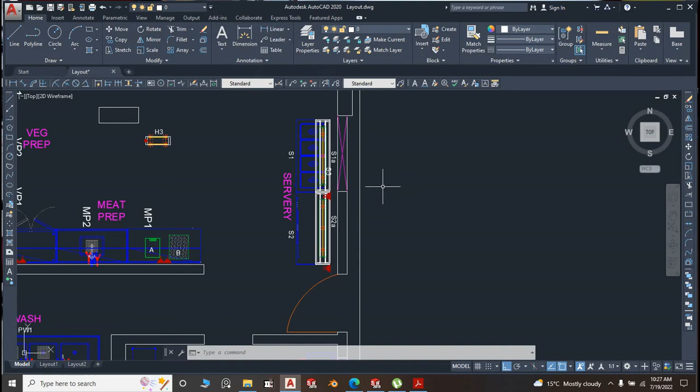So we complete it with savory, we go to prep area, then we will come to the cooking island. Right now, today we are talking about the 5 container bain-marie with a tray slide. We will talk about the hot pass, the heated overshelf later. Heated overshelf, it's not much.

Right now, this is the bain-marie. It's a 5 container full 1/1 GN containers. 1, 2, 3, 4, 5.

Now, this is the tray slide. Remember, the tray slide is supposed to be on the side where the waiters or waitresses are picking food from, not in the kitchen. This side is in the kitchen where the chef is serving from. You can access the undershelf from there. So this is on the side of the sitting area, right?

Okay, now this is one of many designs of a bain-marie. Our bain-marie, the well and the top is one, and it's a complete unit. Welding is done here and there. So you bend this alone, you cut and bend this side alone.

Now these dividers, they are not welded, they are just placed on top, so that should you feel like using a half GN container or a third, you can move them around and see how you arrange them.

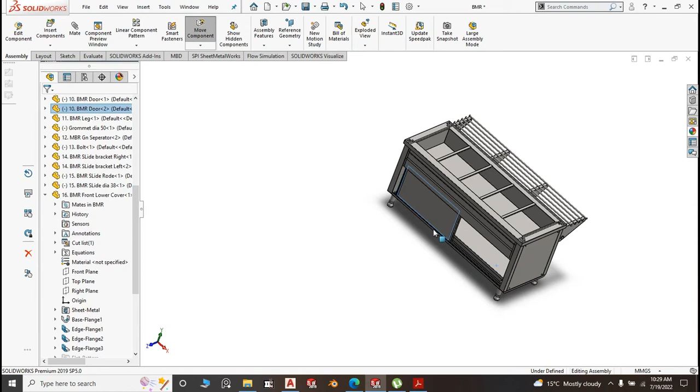Thank you. If you look at our bain-marie, the undershelf is not coming all the way to the front because of these sliding channels. I don't like this design of having sliding channels under there, but again, it's quite hectic to do sliding doors with top rails.

It will make this bain-marie a bit expensive, and buyers might not be willing to meet the price, so we do it like this, a little bit cheaper but very much working. The functionality of the bain-marie is not compromised.

The only thing I want to mention here is that the undershelf does not come all the way to the front because of cleaning. When you have these channels and they are on the same level, almost on the same level as the undershelf, cleaning will be an issue.

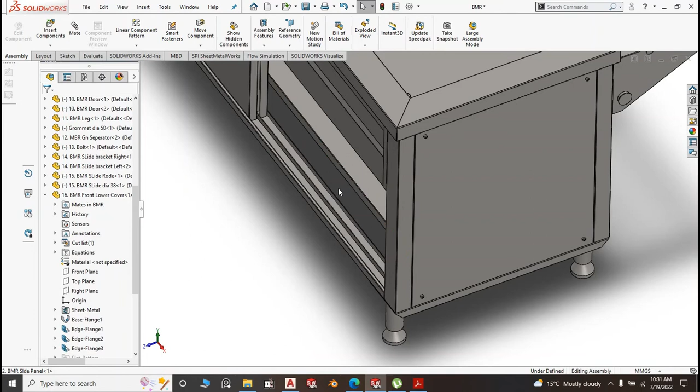And of course, given that this is a bain-marie, as you can see here, we have a hole for the drainage and a ball valve, which we are also going to design a bit later. There will always be water down here, so cleaning it, that's why you need this about 100 to 150 millimeter gap, so that when you clean, the water can go to the floor and you wipe the floor. You can also, if you want, punch some holes on these channels.

I wanted to mention those few things before we get right into it. The other thing is that this panel, as you can see, these are blind rivet type nuts. You call them what? We call them inserts here. I don't know whether you guys use the same word.

So instead of welding a nut on the panel, you do inserts, the ones that have threads. You want this panel to be removable, where you are going to put your conductors, your electrical cables and all that. You hide them here, and you want to be accessing them in case of any maintenance and repairs and all that.

Yes, we have different types of elements. Some people prefer putting straight elements, others a circular element at the center. Different designs of elements that you will take up with your electrician. The electrician will sort you out as far as the element is concerned.

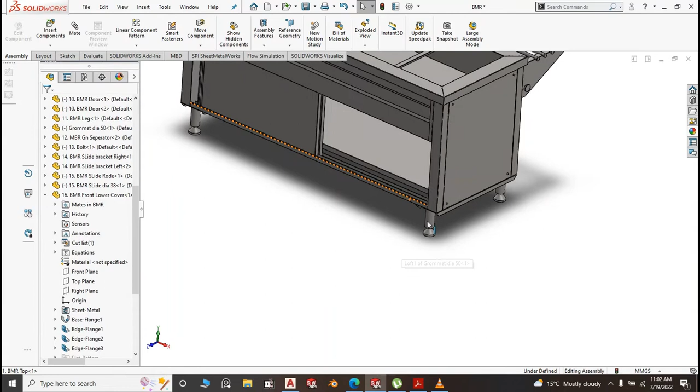Now on the other side, there is nothing, so this panel is fixed. You tack weld down here, tack weld here, and tack weld on the four corners. The idea is to avoid much welding, especially showing up on the front or body of the Bain Marie. The legs are adjustable. There is a channel under there for where you're going to weld your legs.

The others, let's talk about them as we design it. So I'll go ahead and close this, save all, rebuild and save.

Okay, now the size of the Bain Marie is 1830 by 700. And when you add the tray slide, it's 350 at a height of 200. It has tubes, stainless steel tubes, dia 20, and some brackets.

We have a front panel. What I should mention here is it is very important you keep the internal size at 515 by 305, because a full GN container is 530 by 325. You want the GN to be sitting pretty well on top of the Bain Marie, so that it may not slide and sink in the water and your food gets into the water.

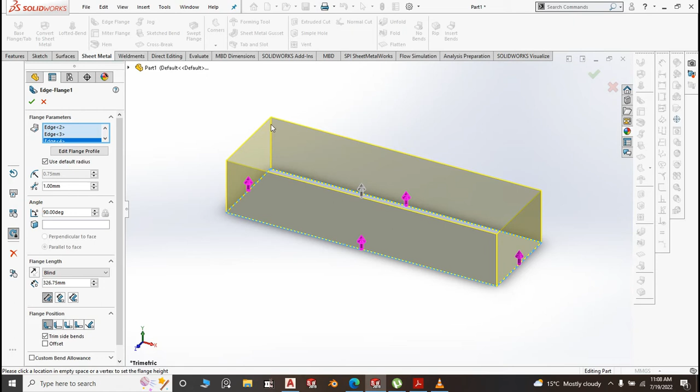Then we go to edge flange, and make an edge flange all around the Bain. If you are cutting this thing with a CNC machine, just do it - don't do this part alone and this part alone and this part alone. You will have a very big issue when it comes to joining them. There will be some radius, the gap will be very huge, and your welding should be done not from the inside but from the outside, with a very small gap.

Actually, the gap should be like 0.1 millimeter - the radius gap is 1 millimeter. You're trying as much as you can to make sure the gap is very small so that the welding might not penetrate, because polishing this corner is very hectic. So when the gap is so small, you just do the pickling paste, clean it, and that's it - no welding there, because when you put your welding machine here, the tool will touch this face and that face and leave marks, and it won't look neat.

Now the other thing I should mention is the depth - the depth here is 200. This is determined by the depth of the GN containers. This Bain with 200 depth is for a GN container with a depth of 150. You don't want the GN container touching the heating element - there should be some clearance between the bottom of the GN container and the heating element. So 200 is ideal.

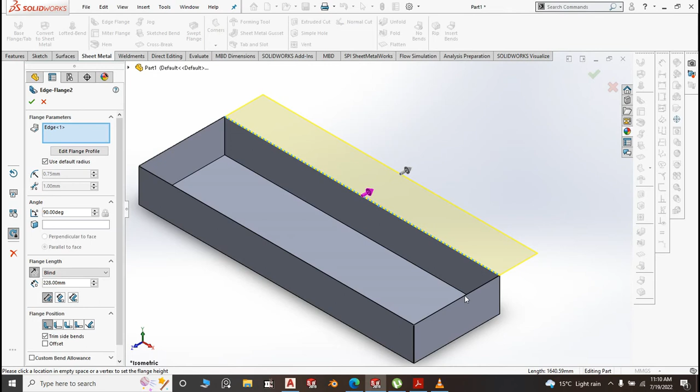Click OK, you're good. Now let us go again and do edge flange on this side, and you need to be careful where you are choosing your edge flange. If you choose this line, make sure all the others you are choosing from the same point.

Finally here, put your radius again to 0.1 - I will change that later, I will change the default to 0.1. This is supposed to be 93 because you want to keep the size of it to be 700 by 1830. That is the ideal size.

Now we go to closed corner - closed corner, and we are doing butt type. The gap there is 0.1 millimeter, and you choose this. It will choose everything, so clear it, choose this, go here, choose this. You can choose two corners and mirror the other, then choose this side, the corresponding or matching face is this face there. Right click - you can select all of them, but again you can do two and mirror.

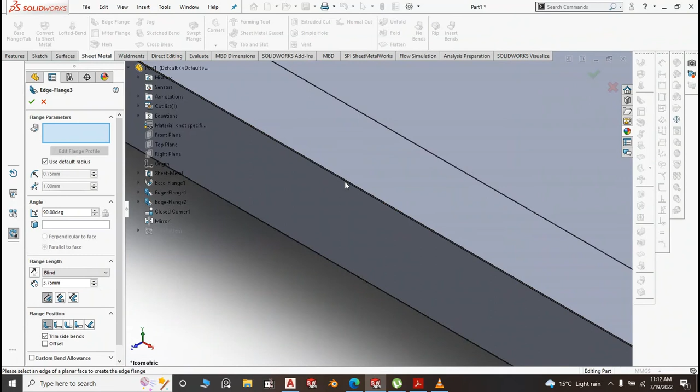Click OK, you have your corners. Now edge flange again, sheet metal, edge flange there.

Again, make sure the radius matches the others, that is 0.1, and the size is 50 millimeter. Keep material inside, and the length from the outer. Those are things you can manipulate the way you want. Right click or click OK.

There is something there with that edge flange, let us edit it. If you can see that gap, they will come to overlap somewhere. So this gap, let us make it 1 millimeter, that radius.

Now one should be big. Yeah, you don't want the overlapping. 1 mil, 2 millimeter. No, this should be 1.1, and this gap should be 2 millimeter.

Yes, see, they are not touching each other. That is why we were getting that error. I think that fixes it. Fixed, there is no error, as you can see. The gap is not that big, so you're welding, no issue there.

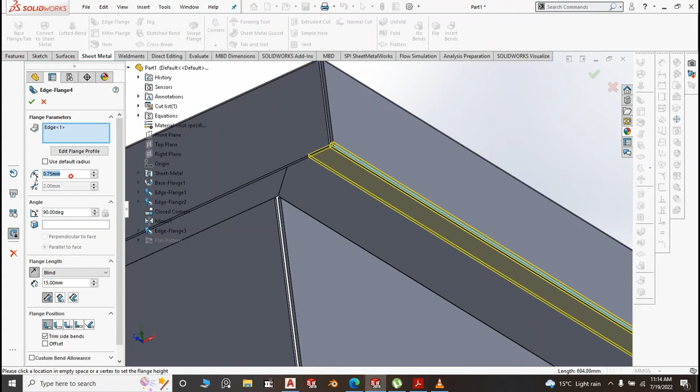Now finally we do an edge flange of 15 millimeter going to the inside. Choose outer, let us make this 15 mil, radius 0.1 again. Choose all the other edge flanges.

So you do edge flange there of 15 millimeter and you're good, right? So your top is almost ready.

Now some people, like I was saying, prefer doing this part alone, then the wall alone, then they come do the welding right here, which I don't like that design, but it is a bit economical as far as the material is concerned, but it adds you a lot of work.

So go ahead and save it, the way you have been saving them. I have a folder here known as Bain, and I will save this as BM top.

Save. Now let me do the hole for the drainage. Normal, choose that face and do a new sketch. Circle.

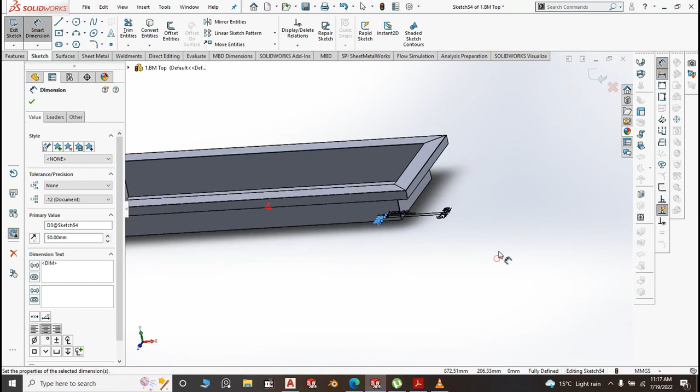And from this corner, make it like 100, and from the front side, make it 50. Again, you don't want the ball valve to be far away such that somebody needs to bend and insert their hand in there to open the ball valve. Yeah, you want it right near you.

Extrude and cut, link to thickness. Yes, your hole is there, your hole is made.

Save. Now let me mention something else here. Let me save this in a form of DXF folder, DXF file.

Then we include bent lines. Just want to open it real quick. No, I don't need to go to AutoCAD. Well, when you are doing your nesting, let me open this file with AutoCAD.

PC, desktop. Let me go to desktop, projects, Solidworks, layout, BM, DXF. Yes, here you go. So what you are going to do is you take this and this.

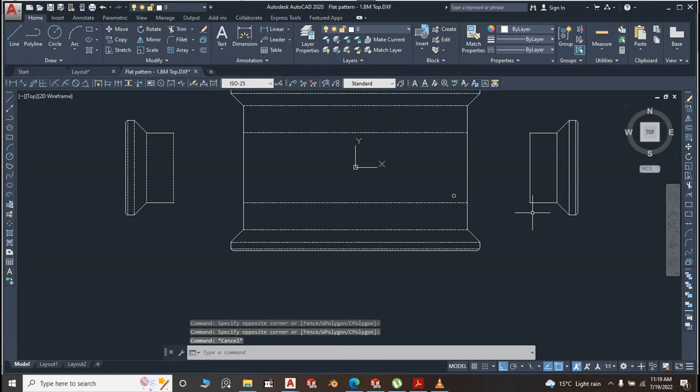Yeah, so that once you bend this, and you bend this, now you can come up and you can come back and join and do your welding, right? Don't put this all the way into CNC cutting, you will waste a lot of material.

Cut them alone. In fact, these you can get them from these two sides of the wall and the top. They are pretty small, you can get them from offcuts if you have them, right? And you're sure going to get a lot of offcuts, from the top, from the undershelf, and everything else.

All right, so part 1 is done. Let us go to part number 2. New part, click OK, and this time around we are making the back panel, so we are going to go to the front plane, new sketch, center rectangle, and we do a back panel.

The back panel should be 1830 minus 15, that should be 1815. 18, let us do 1813. Give them a 1 millimeter allowance by 710.

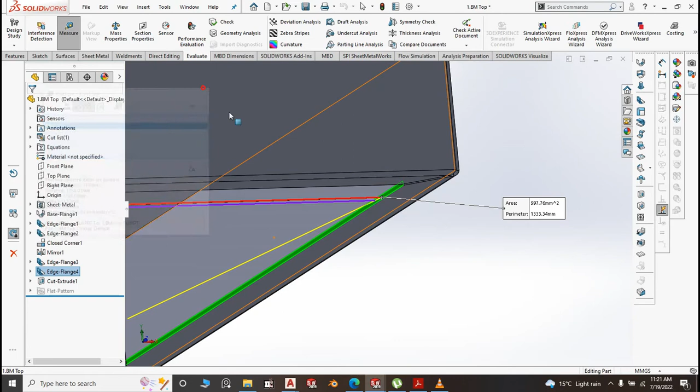Let me also confirm, now that I'm here, let me confirm the size of the side panel. That to this is 668.

Yes, that is 668. Okay, so let us go back to our second part. We edit this sketch and change this to 1796. 1 millimeter allowance. You don't want it to be very tight.

Now we do edge flange. Go back to sheet metal, edge flange here, edge flange here, radius 0.1, size blind, condition blind, 50 millimeter. Click OK. That edge flange is good.

Edge flange again. If you watched the hot cupboard, it's more or less the same as the Bain Marie. The design is almost the same as a Bain Marie. Yeah, this is 25 millimeter.

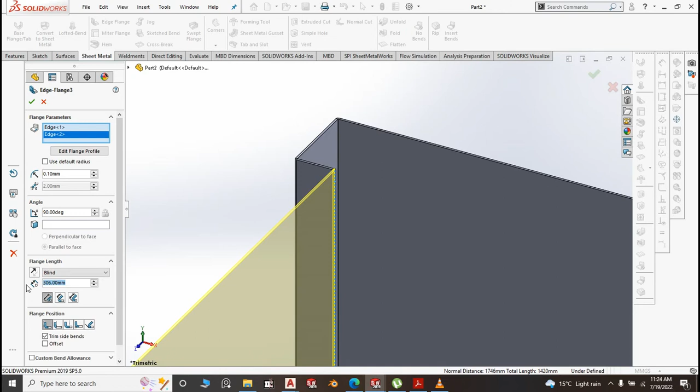Right click. Okay, now let us do the edge flanges on the top. Edge flange here, going inside. Go into this side. And 15 millimeter, 0.1.

Now edge flange again. Edge flange. Edge flange. You can do one side, say the top, and mirror it, or you can go ahead and do all of them as edge flanges, even down there.

No, like I keep telling you, Solidworks has so many options of doing things. You can decide to do one and mirror the other, or you can decide to go all the way. Depends on your speed.

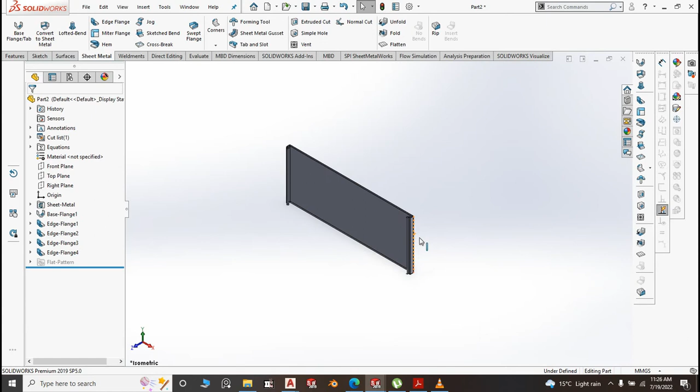Good. Click OK. Your back panel is good. Back panel is good. Now, if you want, you can assign material to the top and to the side. Actually, all these materials are stainless steel. So if you want, assign your materials.

Why am I saving S? Part number 2, BM back. I always have an issue with the back panel. Save it.

Let us go to file. We create... no, sorry, we go ahead and create the side panel. So you open a new part, and this time around we go to the front right plane, new sketch, center rectangle, the origin, and the size here we saw it is 668.

By 710. Height is the same. This is 710. Click OK. Sheet metal, base flange, thickness 1.2.

Then we create an edge flange here. This edge flange, the size of it should be 65 millimeter. We will see whether it will be touching the body of the well. Yes, that's good.

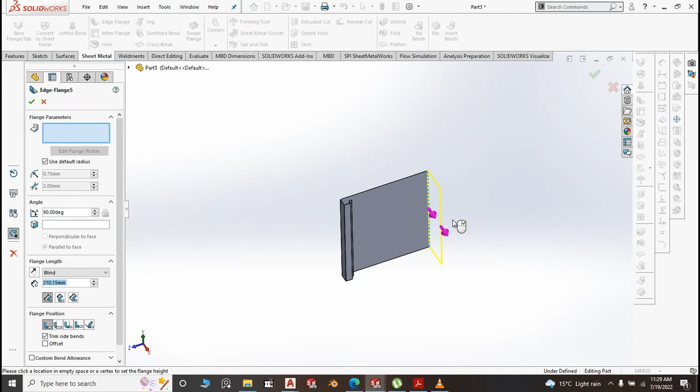At the back there you have just one edge flange, 15mm is the size of the edge flange, blind 15mm. This will be sitting against the back panel. Okay, now we create edge flanges here, and 15mm, you can even do 10.

This is always for the purposes of giving your panel some strength, okay, and that sharp edge and all that, and neatness. It is very important to have this edge flange here at the top and at the bottom. Yeah, let us do one, then we mirror the other.

That's good. Then go to top plane, feature, mirror, and what you're mirroring there is the last edge flange. Click OK.

Like I was telling you, we have so many options. See, whatever you have down there is what you have up there. And remember, this will be the inside of the Bain Marie. So cleaning, assuming that this bend was going to the inside, you will have a dead corner here.

Cleaning this corner, issue, my friend, issue, big issue. And you know, you're not supposed to make lives of the chefs hard. Side panel, yeah, you are supposed also to consider the end user when you are doing your thing.

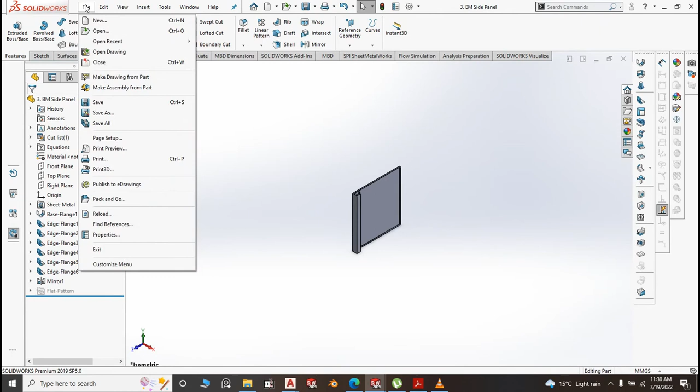Now, as usual, when I have a few parts, I start my assembly and continue designing the other parts as I continue with the assembly. That's how I don't have a lot of issues with too much editing.

Okay, before we continue, right click this one and make it float. So that we may do some mating here, and the matings we are going to do is expand this, the front plane and this front plane. Click OK.

Actually we are mating just the planes, the top plane and this top plane. Click OK. Right plane and the plane of the top. Click OK.

Exit, right click and make it fixed. Good. Now insert component again, and the components to insert here are the back panel and side panel. Shift, side panel, back panel, side panel.

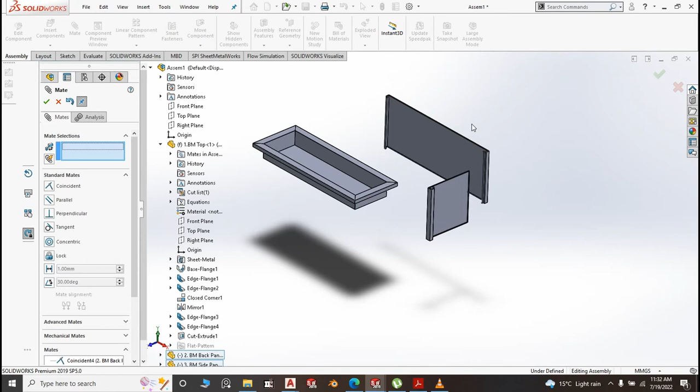Now let us do our mating. The first mate I'm going to do, and most of the time when we are doing our assembly, we assemble the panels, the side panel, the back panel, the undershelf, then the top is always the last part. So this part sits at the back of the back panel, and of course they are of the same height, so this top and this, they mate.

Now the reason why I decided to go that way is because I wanted to mention that here is where you're going to do your tack weld, and down there you're doing your welding. You are not supposed to tack weld anywhere here, because if you tack weld that, it will show up at the back, right? And you know, the problem with stainless steel, when you polish it, you will have marks that will be seen. It will be different from the part with the PVC.

Yes, the top of the back and the side rests on the bottom of this face. Now this face touches which face? It touches this bend, this edge, the 15mm edge.

That's good. Then we go to the right plane, and we go to the right plane of the back. I want to expand this, the right plane of the back. See, so it is centered at the center. Then what else?

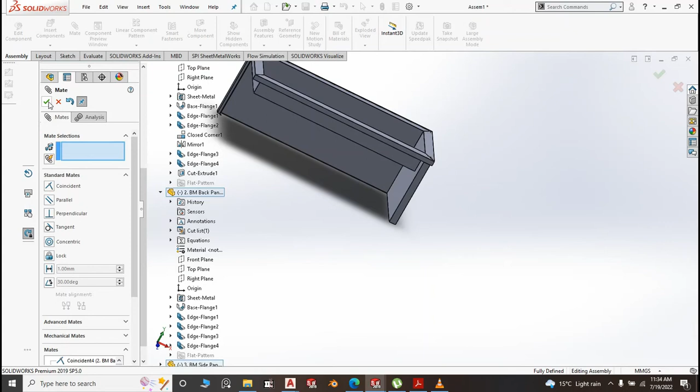This and this mate, they are supposed to be flashing. Yes, exactly. So that is it. I think that mate is enough, right? Sure.

Yes, that is enough. And there is some clearance, you know, the side panel is not touching the wall. There is some clearance, good clearance. Now, the reason why the back panel didn't come all the way to here is for you to have room for the cover panel, right? Good, I think that looks okay.

We can save it, save all and save this as Bain... 5 container, or even Bain Marie is enough. Save. Now I want to do the side cover panel.

The side cover panel, let me evaluate this and get the size from here to here. That should be that normal distance, 567, so we do 565. And where else should we evaluate? From here to the bottom here. To that bottom is 661 by 661. I can do 656.

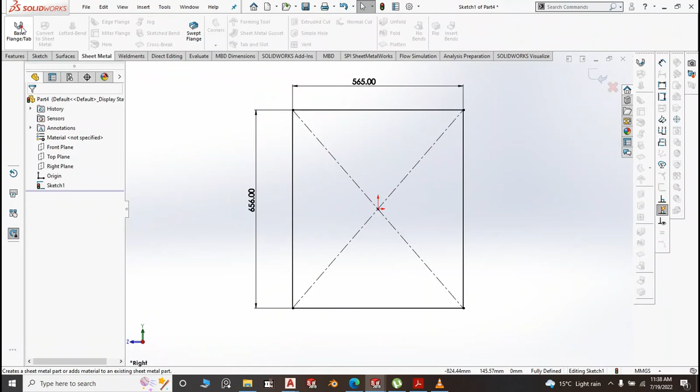That's good. Sheet metal, base flange. The side covers you can do 1mm, 1.2mm. Some of these things depend on what offcuts you have. You don't need to take a full sheet of stainless steel and cut this part. If you have offcuts, 1mm is okay, 1.5, even 0.8 is okay, because there is no weight actually. It's just a cover, and when you do the bending, you give it some nice strength.

Edge flange on all four sides. And the size of it — remember we have an edge flange of 25mm, and you want your side cover to be flashing with the side panel. So end condition 25, do it 23. That's okay. Then do another edge flange, 15, 10mm, this edge flange here.

Again, these edge flanges, especially these, the size is one of the determining factors for the edge flanges here is your bending tool. If you have a bending tool that can do 8mm, 6mm, 10mm, you're good, but it should not be that big — you don't want to waste your material very much.

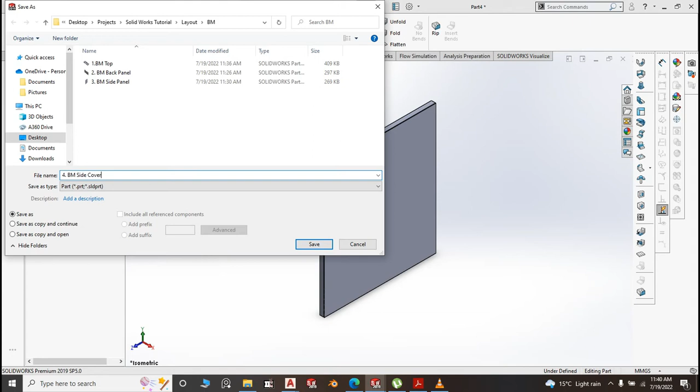Alright, go ahead and save it as part number 4, and this should be BM side cover. For the removable one, I'm not going to punch the holes for the bolts because I want to mirror it — I intend to mirror it when I do the assembly. So you will remember that one of them you need to punch holes. The holes you can put there if you are smart enough; when you're nesting, you do your holes there.

Right, insert, and we insert the side cover. Side cover, we are mating. This face should flush with this face. That's okay. And the bottom and this, that will be good.

Now we can go to the planes. Is it the front plane? Yeah, the front plane and the front plane of the side cover. Side cover, front plane. Let me expand it. Front plane of the side cover. Good. Or you can even do width.

Let us see whether there is some clearance. Yes, see, they are not touching each other, but again, don't make the gap so big. You just want it to have some breathing space. Up here, it is good. The side cover should not go under the top. Under there, removing it will be somewhat hectic. Yeah, we save that change.

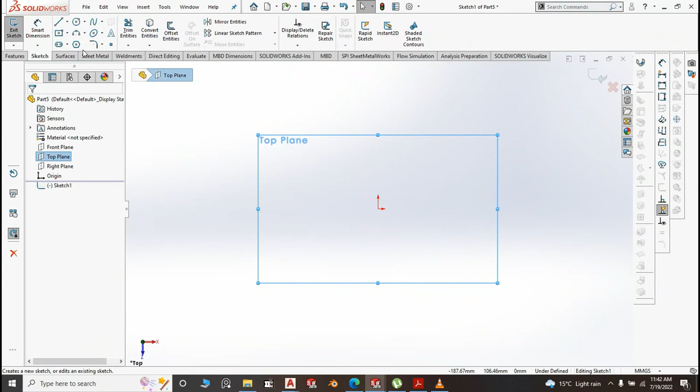Now we want to do the channel that will be carrying the body and the legs. Right, new part. Got top plane, right click, OK. Center rectangle from the origin. Doing these things from the origin helps while you are doing the assembly, and this should be 150.

150, that's good. Go to sheet metal, base flange, and this, because it will be carrying the weight of the Bain Marie, should be 1.5mm thick. That's okay. Then do an edge flange here of say 20mm, radius 0.1. I think that's good. Right click.

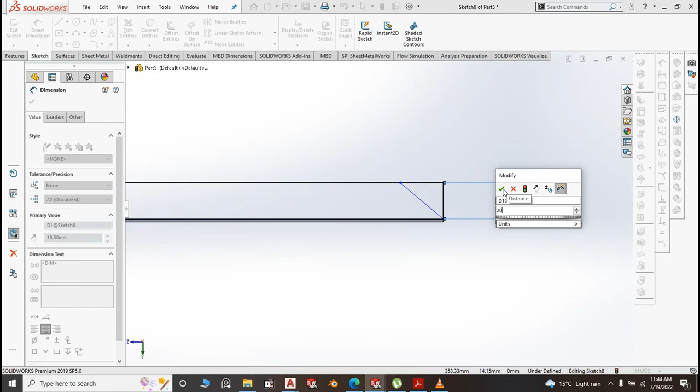I want to edit the sketch. Edit the sketch, normal. You need to cut it 45. Do a line there. Do another line here. Smart dimension. This, make sure you define it as 20. You don't want when you are trimming the size to adjust itself. It's a 45 degree.

Same applies to this side, 45. Then trim this, and you trim the other side. Trim that. That's good. Exit.

Wow, what happened? What happened to my edge flange? Oh, it's good, right? Yeah, it is good. Don't want to leave it at 90. It will be sharp and it will look ugly.

Now go to the front plane. Is it? No, right plane. And you mirror entities, you mirror that edge flange. Mirror, what you're mirroring is that edge flange. Edge flange, click OK. I didn't want to do this, then I start editing here and editing, or extruding and cutting.

So we save this part, number 5. Number 5, BM leg. Let us just call it leg channel. Leg channel. Save it. Go back to your assembly and insert your leg channel. Insert leg channel, mate.

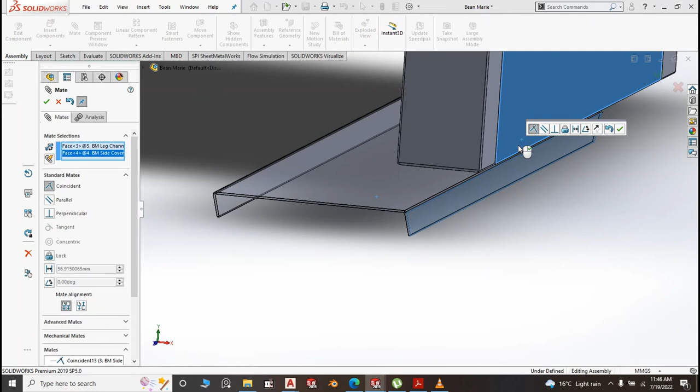The top of it should be sitting on this, and it should be flushing the outside. Then we go to the planes. Is it the right plane? No, clear, the front plane. Front plane and the front plane of the side cover. Side cover, front plane. Not side cover, but leg channel. Front plane. Yes.

We did 668, so let us edit this. You don't want it protruding. Edit sketch, make it 666. 666. Save this. In fact, you can, yeah, feel like that is okay.

Now let us collapse these few things here and there so that we are not getting confused in the process. We go to right plane and mirror components. And the first component we are going to mirror is the side plane, the side cover, and that one. What do we call it? Yes. See how Bean Marie is taking shape.

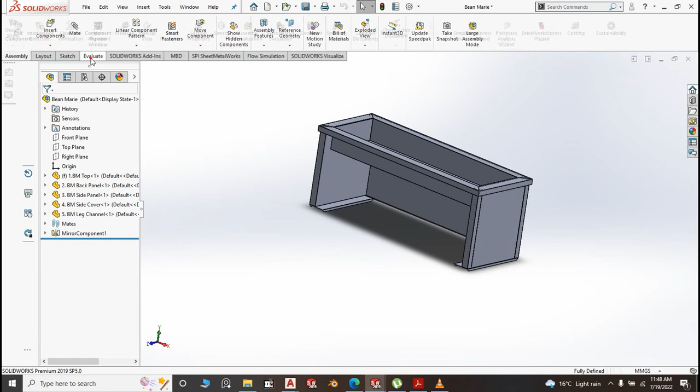Now we need to evaluate and get the size of the undershelf. From here to here, it's 1666 by 530. Remember, we are trying to get that gap there. So we go to File, New Part, click OK, and go to the top plane, New Sketch, Center Rectangle, Smart Dimension, 1664 by 530 minus 15, 515. Yes, 515.

Sheet metal base flange, this should be 1.2 millimeter. We don't intend to store a lot of things there, and in any case, if you feel like they will be using it as storage, you can do some backing, you can do some channels there for backing. Edge flange, this edge flange goes to this side and it's 15 millimeter high.

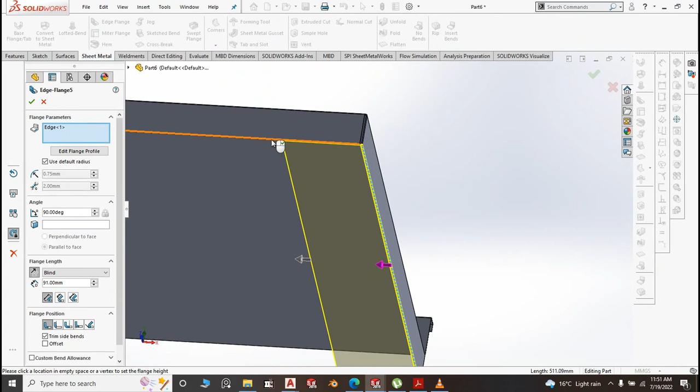Point one, and this blind 15 millimeter, and you're good. Your undershelf is good. In case of anything, we will get back to it and edit, save it as part number 6.

BM and Undershelf. You told me shelf is written like that, or it has an F. Our language here, English.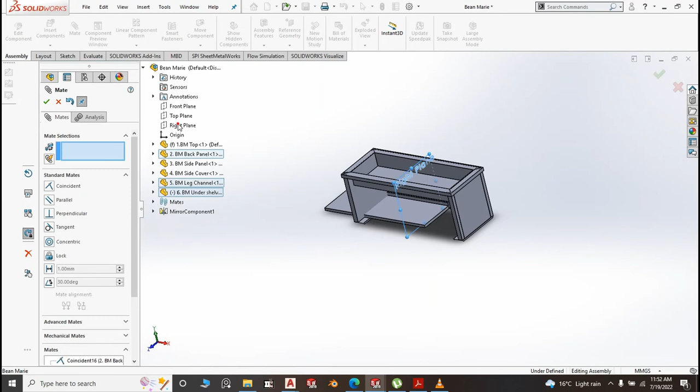English is not our language, just learned it from the Muzungu guy, but we appreciate it because we can communicate to the world. Imagine if Africa was not colonized, all of us talking our own languages, and now the world has become one global community. How would we be communicating with each other? Here I am speaking my very sophisticated Bantu language, trying to explain to a Muzungu guy. I hope you are following how we are making this, okay? So you guys that colonized us, you did us good, even though... what am I saying, why am I getting into politics, man? It happened, and it was nice. In fact at times I feel like we chased you from our country early, you should have stayed for quite some time to do some development here and there.

Yeah, that's it. Now we are going to do the front panel. Before we do the sliding panels, let us do the front panel. New part, front panel, front plane. We are doing the front panel, and this is center rectangle.

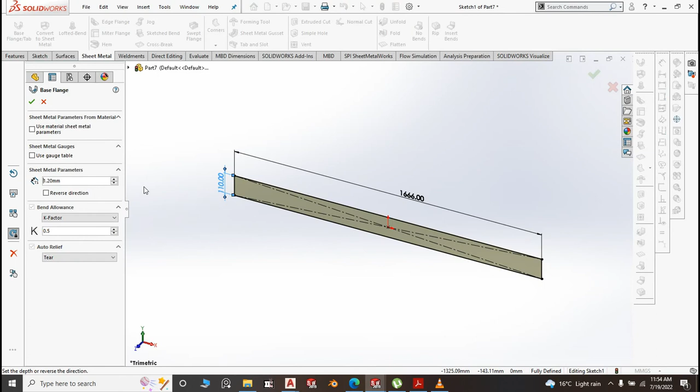The size of it is 1666, just like the undershelf. And this we are going to give a height of 110. Sheet metal base flange, this can be 1 millimeter, 1.2, 0.8, but this is a bit long, so 1.2 millimeter is good. Edge flange here of 20 millimeter, 0.1.

Developers of Solidworks and these drafting CADs, you can hear me. If you happen to come to my channel, you should watch how your softwares are helping us. I want to pose a challenge to you and any other software developer out there: is it possible for you to develop these things to accept voice commands? Like I can just tell it, I need a base flange here, I need an edge flange here, instead of clicking everywhere. The world is changing, this is 20 at an angle of 30, at an angle of 30. I don't know whether it's making us more lazy, or I don't know.

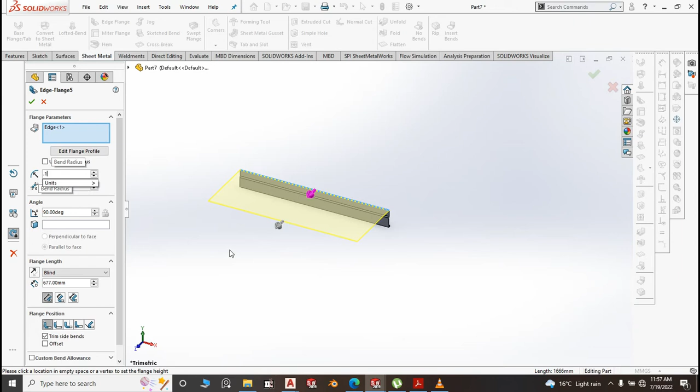If our forefathers were to wake up today and find these things, how our world has changed, I think they would just die immediately. My grandpa jumping into a driverless vehicle, and you try to explain to him that the vehicle is driving itself. What kind of shock do you think will hit him? You will just die again immediately.

30. We are trying to give this front panel some little bit of design. Don't just put a plain piece of metal there and call it front, give it some design, and your design should not be limited to this, you do your own design. Just make sure the total height of this front panel is anything between 200 and 250. You don't want, when designing the door, the door to be very big. This should be 0.1 and this should be 50. Side panel, edge flange there, and that edge flange is 20 millimeter, same as the one below, 20.

So please get us softwares that can take voice commands. I expect Solidworks 2020 or 2030 should be one which can accept voice commands.

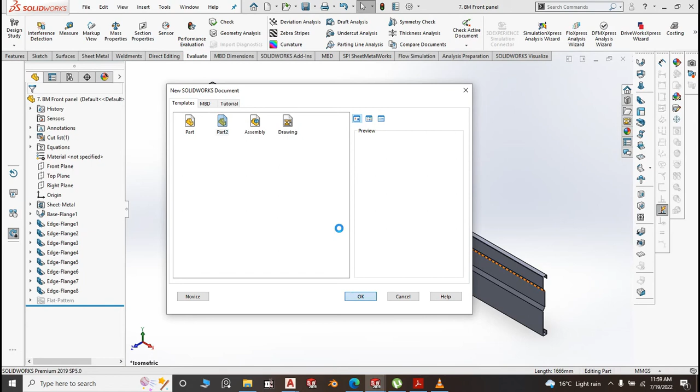Now let me do one more part. New part, okay. And I will go to the right plane, sketch, center rectangle. That's okay, total height we have seen is 255, 255, and this we make it 22. Sheet metal base flange, this also can be 1 millimeter, 1.5 or 1.2 depending. You see this small U channel, a very small U channel that you can cut from whatever offcut you have, or if you have some channels remaining in your workshop. Some of these things are always there in the workshop, depends on what kind of work you do. Like this 20 is big, make it even 15.

You will see where it goes. I will save it as part number 7A, and call it BM front panel channel. Channel is double N.

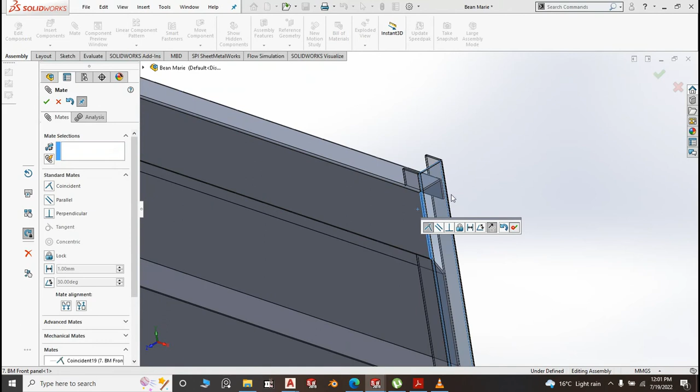You are trying to avoid this front panel having sharp, irregular edges, because you don't want to do full welding on the front side. We'll see about that, I'm getting ahead of myself.

Let me go to advanced mate and do this face and this face, then this. You want the side panel, the front panel, to be inside that U channel. Yeah, so when you do that, that's okay.

Is there anything else I will be mirroring? No, let me mirror it from here. We collapse this and expand this front panel.

Right plane? Nope. Oh, which panel is this? No, I want to expand front panel and go to the right plane, then linear component, mirror component, and the component to mirror is this one.

That's nice. This front panel, you assemble it. It's a pre-assembly, you assemble it, tack weld here and tack weld here. No welding here. So it will always look regular there.

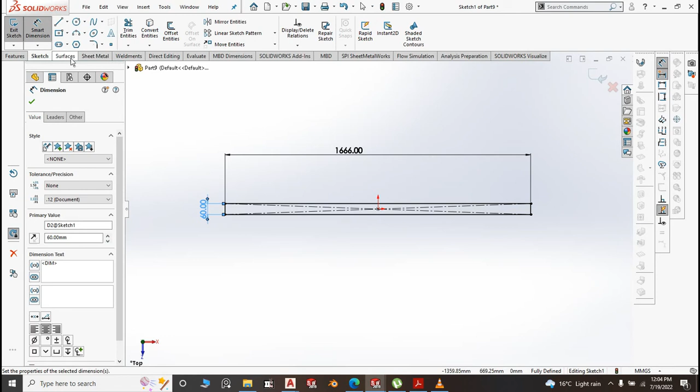This is the same size as the front panel, and it is 1666 by, this should be 60 millimeter base flange, sheet metal base flange, 1 millimeter. Also this will depend with what you have.

Edge flange, that and this, and you can keep also the radius as it is, as the default. There is no harm in that.

Go ahead and save it as part number 8. Should be part number 8. BM sliding channel, door sliding channel. Okay, then because there are two doors, there is an angle line there in between that channel.

Same size, same length. No, I don't want to do corner rectangle, but center rectangle. The length is 1666 by 30. Good.

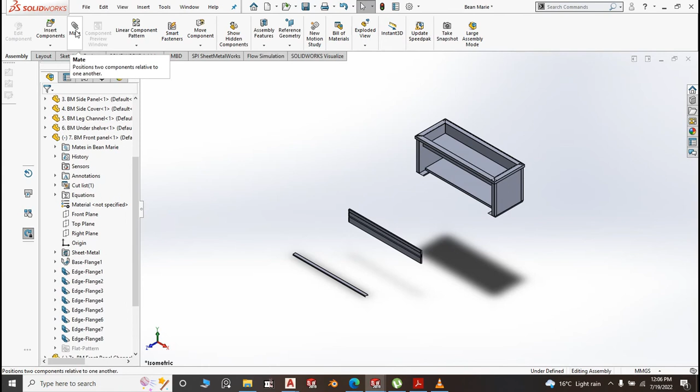Yes. So we go back to our assembly and insert those two. We insert sliding channel. I want to rotate it on, not on the y-axis but on the x-axis, for it to, you know, and insert again the part number 8A and rotate it like so.

Now mate. This angle line should be sitting inside this channel. That's good. And this and this should be same size.

Then we can go ahead and do width. Advanced mate the width between this and this and this face and this face. Great.

Now you have two chambers, compartments, or whatever, for the purposes of having each door sliding on it. This acts as the stopper for the first door, and this acts as stopper for the other door. Now we continue mating this, mate.

That face should sit on this. Oh, are they good? Please select a mate. Okay, standard mate, standard we go. Did we select standard coincident? Good.

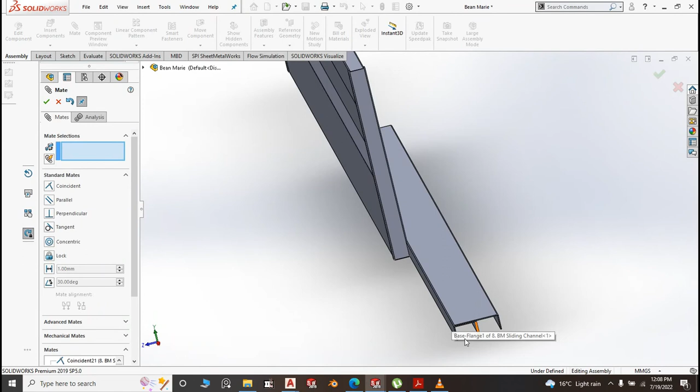And the bottom of this channel, they should not protrude under. They should not be visible. That's the thing, and why I decided to mate them before mating with the Bean is because I didn't want issues with choosing the faces. Yeah, we'll start hiding components and all that.

That's good. Then the whole thing, now you see how it goes. Now the whole thing, this should be sitting, should be flush with this bottom. Don't put it in there, don't let it go all the way up there. And this should flush with the front panel.

That's good. Now you can go and pick the planes, the right planes. Is it the front? No. Oh, I'm getting it wrong every time. Right plane of that, and right plane of the

front panel. Is this the front panel? Right plane. What happened? No. Clear selection. It should be, note of that. I think it's the front panel angle.

Yeah, that right plane. This right plane? And which right plane? And this right plane. Yes, exactly. That mate is good. See? That mate is good.

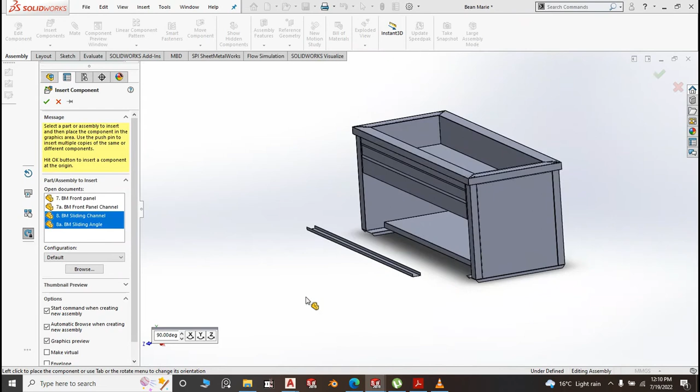Now the other thing is, let us insert again this channel and the angle for the bottom part. One. This we are not rotating. Mate them just like we mated the others. This sits on top of this.

It flushes with this, and you go for advanced with this and this, then this face and this face. That's okay. Then go back to standard and coincident relationship.

Try to mate this face with this face. You see, where did it go? You see, then this sits on top of this channel. Now you realize this channel was a little bit long. In fact, you can make this to touch this face. Yes.

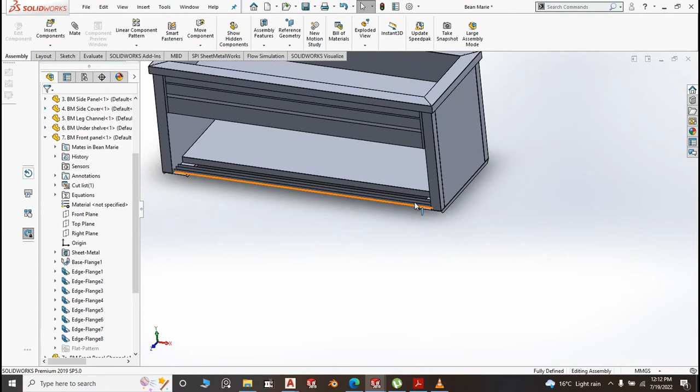Now, if we were to make this flush with the outside, then the doors would be inclined. They wouldn't be perpendicular, they wouldn't be standing at a right angle to the ground. They wouldn't be straight, and it wouldn't look good. So what happens here between this space? There is a small front channel that compensates that distance of 21. And how does it look like? Only one way to find out, and that is by creating it.

So I've opened a part. I'll go for the front plane, sketch, center rectangle, same size as the other one, as the undershelf, everything. That should be 1666. Height of it should be right around 1 inch, that is 25 mil, and you call it base flange. Thickness is not that important, determined by, and you saw that distance there was about 21, so we can make this 18. We are giving it some painting allowance. You don't want it to be bigger than 21. Actually, if possible, should be less than.

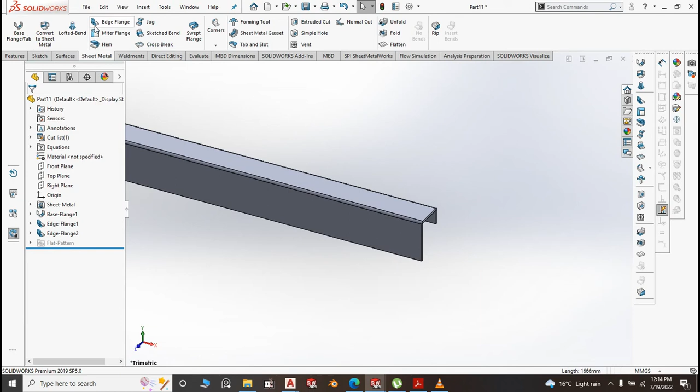So here we do 18 mil. I click. Then here we have an edge flange going down, and that down should be like 10 mil, same radius, 0.1. That's good. And again here we have an edge flange of 15 mil, 0.1, and this is 15 mil. Good. So that takes care of that space that you saw, and your Bean will be very good.

BM, we are saving it as BM front lower, what? You can call it channel. As long as you know what you're doing and the namings, I don't think that you're going to have any issues. Let us close some of the things that we don't need. We don't need this, we don't need this. This is done with, this is done with. And also once we insert that part that we've just created, we'll close it.

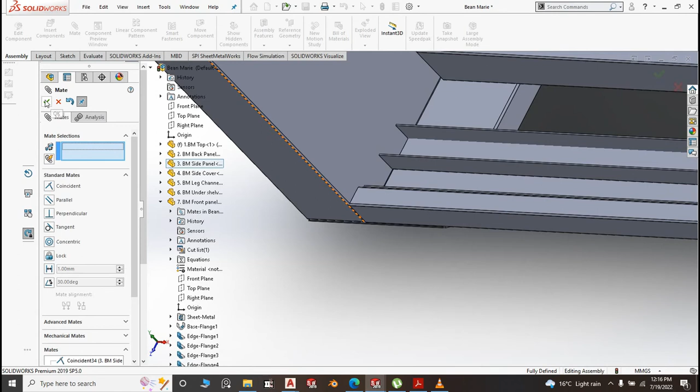Mate. So now this flushes with the front. That's good. The bottom side of it, where is it now? The bottom side of it touches the channel. That's good. And you can have, yeah, there's something there we need to, like that. Let me see. This is good. This is good.

You need that bend. You don't need this gap here. You don't need it. Well, you can leave it like that, but you ideally don't need it. So we can make it 21. We can edit this and make that edge flange 21. No, I don't want to edit the sketch. I want to edit the flange there and make it, that was 18, can make it 21.

We save it and even close it. Okay, close it. Yes. But again, you be very careful, let it not clash with the channel.

So your Bean is looking pretty good, and you have the gap, the one I was talking about for cleaning. I was talking about this channel, this leg channel being big, 150. You see it is carrying all this. It is carrying the undershelf, it is carrying these channels, and it is also carrying the side panel. That is why you saw has designed it that big.

Okay, now let us do the doors. The doors, we evaluate and see what size of door we want, and we are talking about from here to the top of the other channel. And for your information, that should be 422.

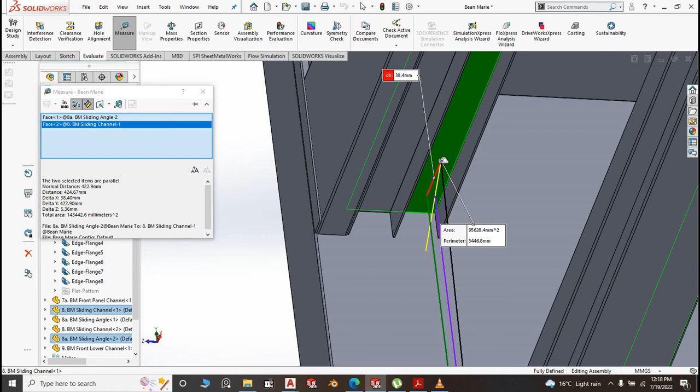Now let me mention something real quick here. The top channel, make them this edge flange. You see, we have made it 20 millimeter. You can make it 30 or 40. Reason, these doors should be removable, right? The size of the door should not be touching exactly like the way we have measured 422. There should be at least 20 millimeter, so that when you lift it like this, 20 millimeter here is covered, you can remove your door. I hope you got the concept.

All right, so let us make the door. This height of the door we have seen is front plane, sketch, center rectangle, height of the door. Let us make it at 425, 400. But if I make it 400, remember, or 405, let me make it 405 by 800. 800, 1600, 1660. We need 1600, 1660.

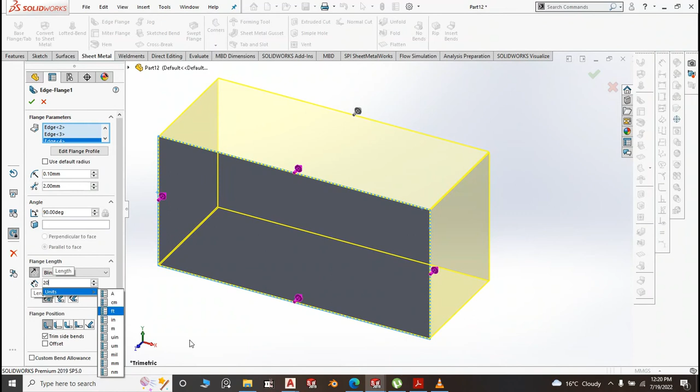Yes, that's good. Edge flange round. Default, number 0.1. Size of that should be 20. Right click, you're good. Then do edge flange on 3 sides of 15 millimeters.

There is no need of making this door double skin. This edge flange should be enough. Don't need to put a cover there and do double skin. Double skin is where you might need to do some insulation in case it's a hot cupboard and you don't want to lose any heat.

Now here we do an edge flange going this side, and that 30 mil is ideal. 30 mil, your hand, your fingers can fit in there really well and open the door.

Now another thing I can mention is that you can also do some different design, in that you can make this at an angle. That depends on what you want. This is just a basic design of a door which you can play around with. Be creative, man. Don't do it the way the others have been doing it, right?

Your handle is good. Now we need to do a hem here, and it's a double fold. Sometimes back I used to wonder, why doesn't the double fold go to this other side? I realized if it goes like that, the door won't be closing well, so it should go in here.

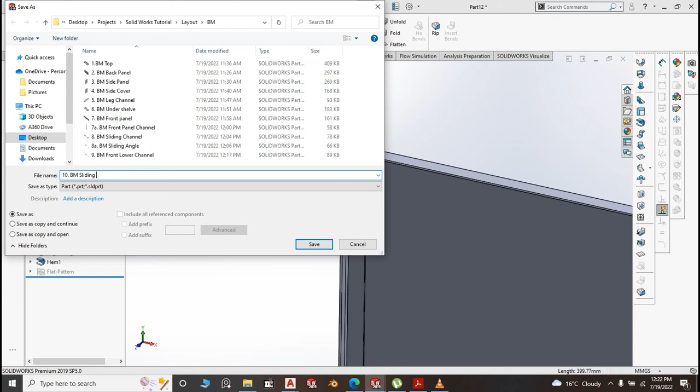We will, when we are doing the assembly, insert the other one and rotate. You see, you can't mirror this. Insert, no, it's not mate. It's supposed to be insert. Insert component, sliding door. That's good.

Let us make this mate now. We'll only give it 2 mates. Coincident, that should sit. Let us do it with the inside. Let that side be for the inside one. Then we go to advanced mate width, and we'll take it to be between this face and this face.

You still have space, and this and this. That's good. We don't need to, we want some movement. We don't need to make it fixed, because that is how it is supposed to be sliding.

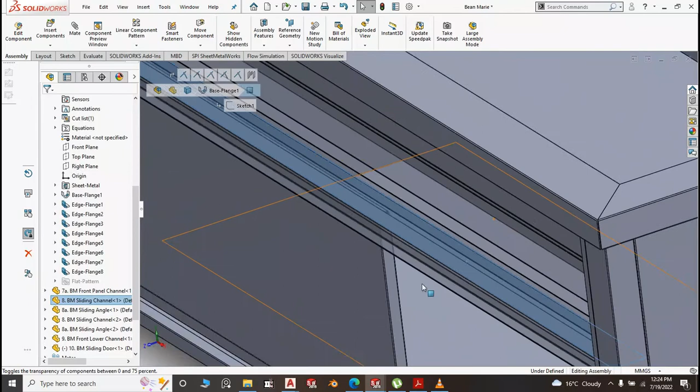Now if you can see, that door is perpendicular and it is inside. Can we change this to transparency? What else should we do? Transparent. This also, let us make it transparent. Is there anything else that needs some transparent view? Let us make this also transparent. I want us to see how the door is behaving. Now let me open the door and give it some color

for the purposes of seeing. Transparent. We go to appearance. Can I make it red? Yes, just for the purposes of seeing it.

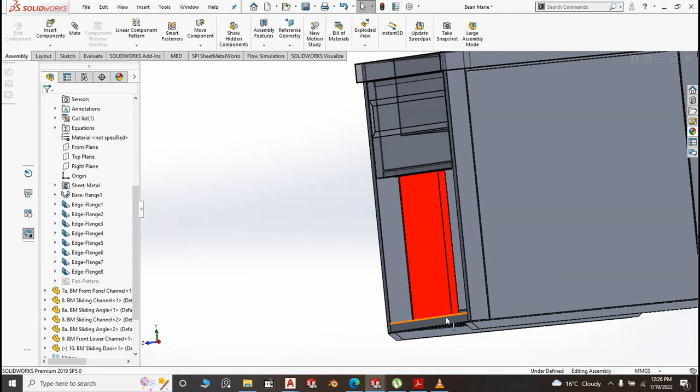You see, it is within the top channel, so that it cannot fall to this side or tilt to the front, right? And as I was saying, it is slightly shorter than just 5mm going up. 5mm is okay, because when you are inserting it, you need to lift it. It's only that we locked it down there in the mates, but you lift it, there should be some clearance here in that rail, in that channel. You lift it, and then you get your clearance down here, and you remove. Don't make it permanent, okay? Do not make it permanent.

Now we can collapse, and change the transparency again. What material is transparent? What part is transparent here? The top? We change transparent. The front panel? We change the transparency. There was something else, the channels down here.

That's good. Now we insert again, sliding door, and we want to rotate it on the z-axis. Yes, like that. Then we can do our mating, and we mate that bottom sits, that face. What's going on? Delete. No, actually clear selection. What happened? This face shouldn't have rotated to

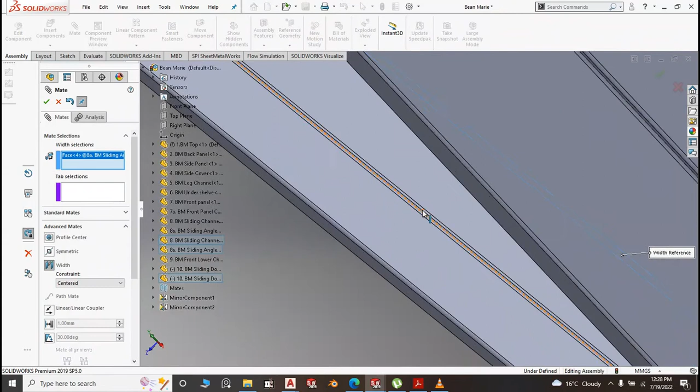this face. Yeah. And then we do advanced, and we do our mate. Our mate is from between this face and which face and this face here. I hope we are going to see it. I hope we are going to see that channel. Where is that face? Yes. And this face. And that face. And this face. I hope the mate is good.

Let us slide the door back to its place, and this other one to its place. How is the overlap? Again, you don't want a big overlap. When the doors are closed, you don't want a very big overlap.

How is the overlap? This overlap is good. So your Bain Marie is kinda done, right? Go ahead and save.

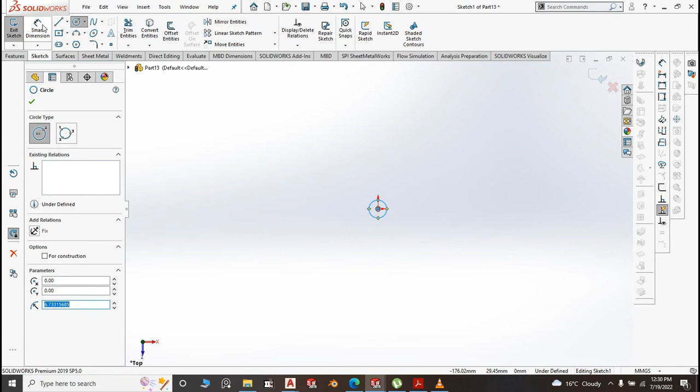Now we go to part and create the legs, and the legs are of diameter 50mm. Part, top plane, sketch, circular hollow section, diameter 50. And since it is circular hollow, let us offset by 1.5 and it should be on the reverse direction.

Now we create the tray slide. The tray slide part should be like this. We go to the front plane, no, right plane. Don't want to do a lot of editing.

Can we do this 200? And this is 350. Sorry, this should be 350. What did we do? This should be 200. That's nice.

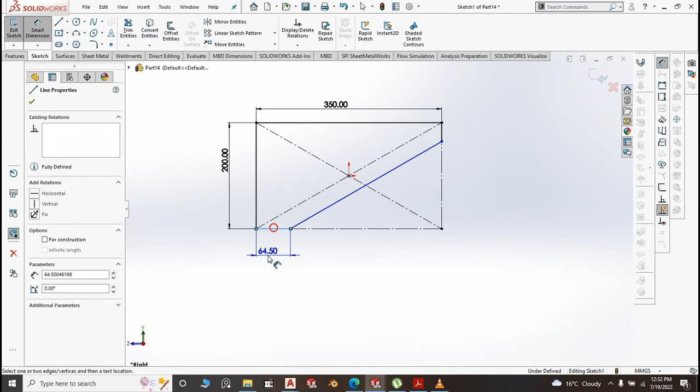Then something that we didn't do, we make them construction. Yes, now line, that is the profile. Good. And we make this one 35mm and the other one 35mm.

And we go to sheet metal base flange. Yes, and this should be 1.5. Right click, good.

Now we need edge flanges. Edge flange here, edge flange here. Do we need edge? No, we don't need edge flange there. We need edge flange here. The size of that edge flange is 35mm, and this should be just 0.1. You can leave it if you want.

It's not much. Yeah, so let us create edge flanges here and here and here. That edge flange should be 15mm. That's okay.

Now, since this part, one can hurt themselves as they are touching, we do some double fold here on the lower one, and then we select this face, create new sketch, normal.

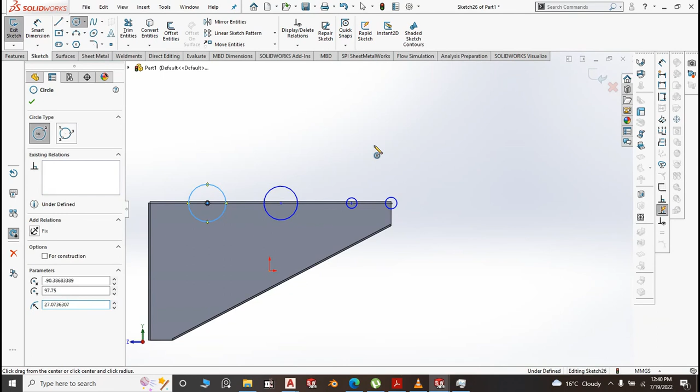You want your sliding, what do we call them, sliding tubes to be sinking the half diameter. Make them equal, and the size of it should be 20mm, 21, 20.5, 20.5. Again, you don't want it to be very tight.

Yeah, and the spacing is 60. The spacing from one tube to the next should be 60. How many did we do? 1, 2, 3, 4. They should be 5. 60.

You can do one and linear component, and do some, what do we call it, is it array? This and this should be equal. You can array them, yeah. In AutoCAD we call it array. In SolidWorks it's pattern.

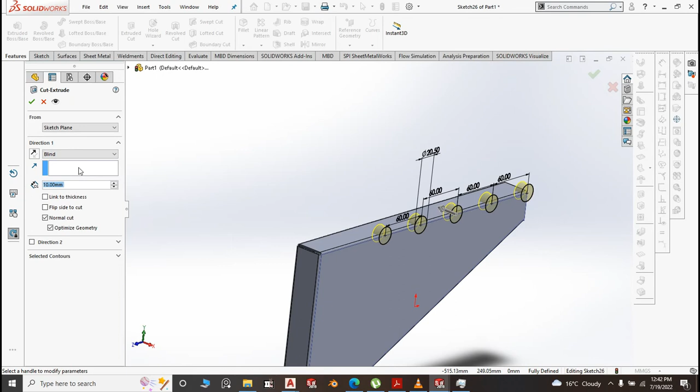With that done, extrude and cut. Feature, extrude and cut. Extrude and cut. It is extruded cut through all.

Nowadays my SolidWorks is crashing. I think I need to upgrade to use SolidWorks 2022.

Save it as part number 11, 12, and call it BM sliding. Does it have a name? Sliding tray bracket. And you can call it left side, right?

Then we go back to the Bean Marie and insert component, sliding tray, that. Then we mate. No, let us insert also the leg. Good. Insert also Grommet, insert Grommet, browse.

The Grommet was in my pre-tutorial. Grommet. Yes, now mate.

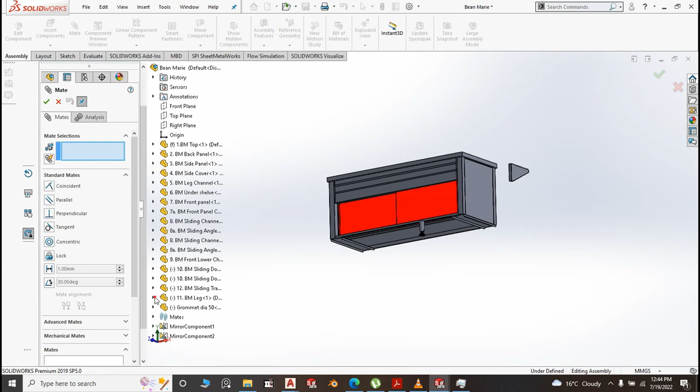Did I exit there? Let me mate again. I shouldn't have completed the mate, and I should go for the leg. Is it right? Yes, that right plane. Then I go to leg channel, right plane.

No, actually, leg channel. No, it is the right plane of the leg channel. Right plane of the leg channel with the leg right plane.

Yes, that's good. Then I can take a distance and make it 15 from here to here. It should go inside. That's good. Then coincident, this face to leg is in its place.

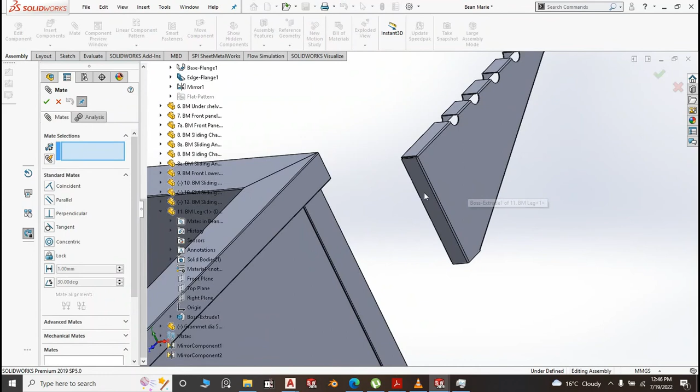We will edit that and take it a little bit inside, make it 50, make it go inside at 25 or 20. Let us mate again this to this, to the back, then.

This face to this face, to under here, click OK. Then you need it going inside by say 50, this and this. That's good.

Now collapse this and collapse this, then open mate. We edit this distance of the leg, we edit it from 15 to 25 mil. Let me see, the 25 is ideal... 25 is not ideal, we don't want it going inside very much. 15 is good, 15 is good, that's good.

Now let us mirror components. We mirror that leg, and we will mirror it on the right plane. Mirror components: component to mirror is the leg and the grommet. Right click. Then we go back again to the front plane and mirror components; the component to mirror is that last mirror.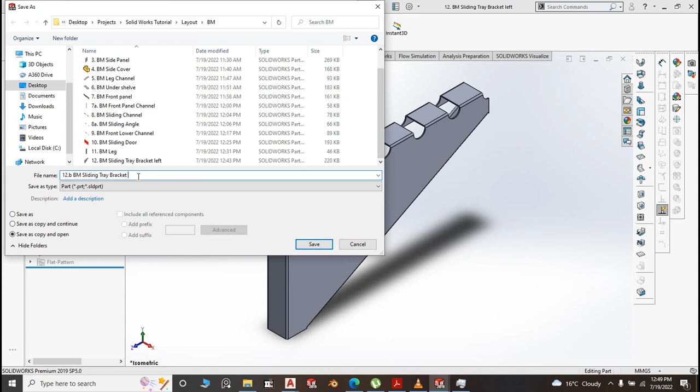Good. Now we open this and do a few more changes here and there. We save this as a copy and open, this should be number 12B, and we call this one right bracket.

Then we will choose this edge flange and edit it and change the direction. It's only the direction that we are interested in changing. Yes, the size remains the same as 30. The others will reset themselves automatically.

Now extrude and cut, we need to delete it and do it again, and also delete that sketch. The reason why we are deleting it is because the orientation where we had done the sketching was on the other side, so extruding and cutting it will cut on the wrong side.

That's it. All these circles, we choose them and make them equal, then we smart dimension them. We've already made them equal.

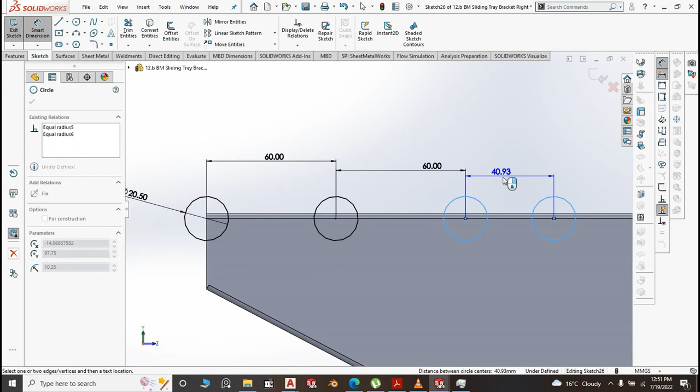This should be 20.5, and the distances should be: between this and this should be 60. This and this should also be 60. This and this should be 60. And the other one finally should be 60. That's by now 60. That's what we are talking about.

Then extrude and cut through hole. Extrude and cut through hole. That's the end condition. Then save.

And insert it on the Bean Marie. First save this work. You know, my Solidworks is misbehaving. It's totally misbehaving. Insert, and we want the right one.

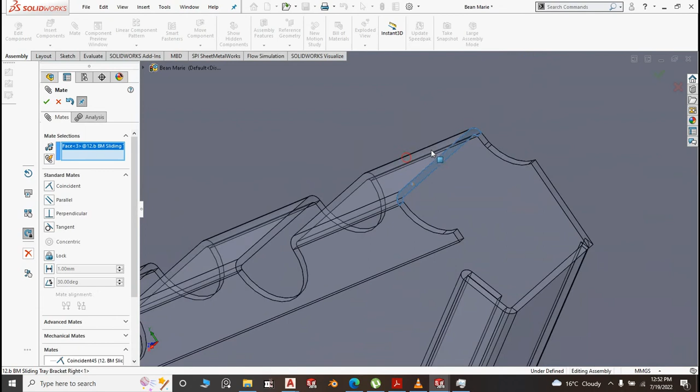Yes. Now we mate these flanges with this. And they are the same size, so sorry, I didn't mean to choose the edge. It is this and this, they are flush.

Then we go to distance 50. This and this should be 50. Yes.

Now let us determine, we need like 3 of them, 4. So let us determine the distance between the 3 is 1693, and we need how many? We need to do 4. I want a linear component pattern for this.

1693 divided by 4, that should be 1693 divided by 4, that should be 424. I'm not sure. We will see.

So we go to this and the linear component pattern. We are lining them in that direction, and we have said let us go for 50. We play around with it. We need 3 of them, and the component is this. Right click. Now what is this distance?

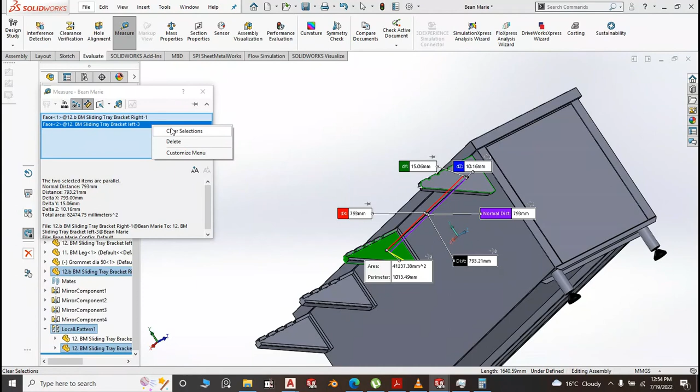Evaluate, measure from here to here. No, let me clear this selection. From here to here is 731.

Then from here to here, to this side is 415. Let us get the difference: 731 minus 415 divided by 4.

The spacings, we have 4 spacings, right? 1, 2, 3. Are we supposed to divide by 3 or by 4? Times 4 divided by 3. 105.

So we go back to local pattern and edit it too. We're supposed to add 105. Yes. Now the spacing looks almost equal.

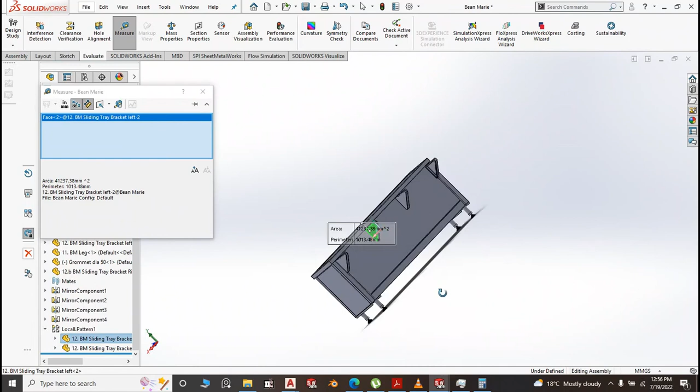Equidistance. We are looking for equidistant spacing. That is 556. And this distance and this should be 556, 520. So we still have a deficit of what?

556 minus 520 divided by 3, 12. Plus 12. We add this plus 12. 567. Yeah, I think that is good now.

From here to here is 497. Why? This to this. What's going on here?

This and this spacing is 532. 532. And the other one is what? Between this and this is 497. 497.

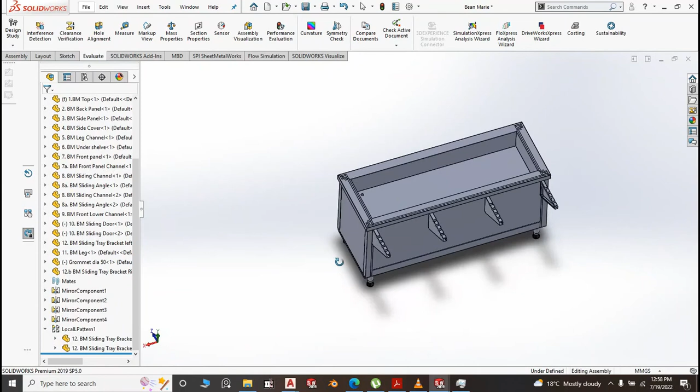Anyway, when you are doing the assembly, you know what to do, because you want equidistance. 514, I can foresee some difference.

514 and this is, I feel like leaving it. 514 and this is 523. 514, 523, there is a difference of 5 millimeters, of 10. 514, 523, that is 9. 9 divided by 1, 2, 3, 3, 3, 3.

Spending a lot of time here. Minus 3. I feel like this is good now. If it is not good, you figure it out. 520.

And between this and that, between this and this, 520. Yeah, equidistance. It will take some time there.

Save. Before I go, let me evaluate from here to here. That should be 1796. 1796.

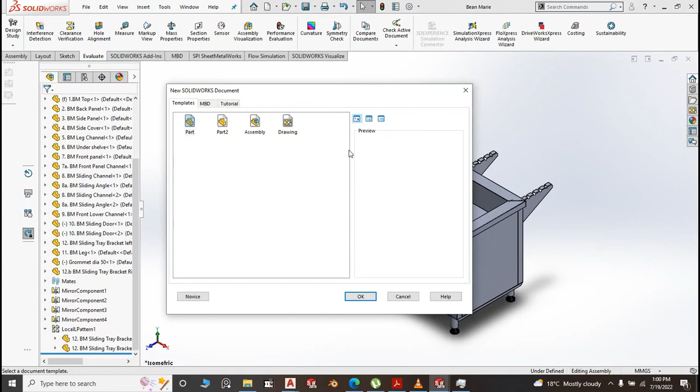Part, new. Right plane again. Right plane. We are creating the hollow section for the tray slide.

Diameter is 20. 20. Then we offset it by 1.2. The thickness of that hollow section should be 1.2 and should go to the reverse direction. That's good. Extrude mid plane,

Until we said we extrude it by what? 1796. 1796. Oh.

Yes, like that. And we save it as part number 13, BM sliding section, hollow section. Use the name that you feel is appropriate to you. Now let us create the last part, which is the dividers.

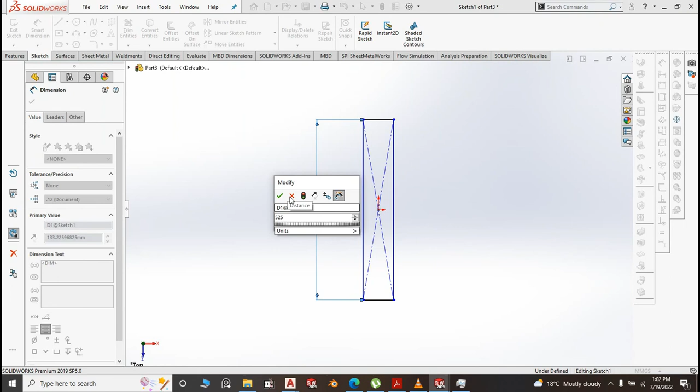Top plane, and this should be center rectangle, and the size should be 5 millimeter, 5 millimeter, 515 plus 10, 525, 525 by 30, base flange.

This 1.5, 1.2, depends with what you have. Edge flange here, that edge flange should be 20.1, and this should be 20. Okay, let me edit this sketch. Normal.

I create a line here. It's okay, another line here. That's okay. Then this line and this line, I make them construction lines. Then I dimension this. This should be 20. Even 15 is good. This and this should be, is it 5 millimeter?

5 millimeter. Is it? No, we should make this, it should be sitting, say 10 millimeter. We'll change the size if need be. This and this should be 10 millimeter.

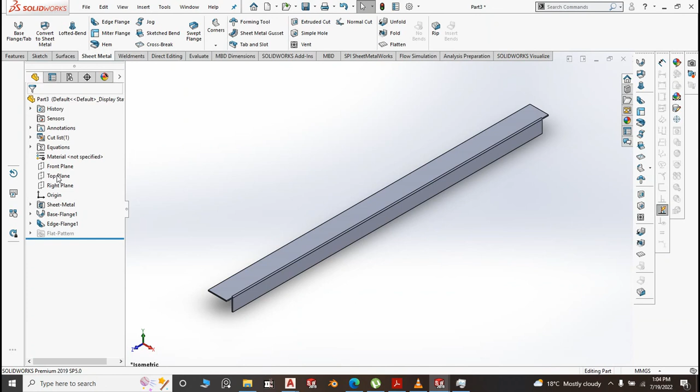Normal. Then we take, is it the right plane? Right plane, and the mirror entities. Mirror, and the entity to mirror is that flange, edge flange that we just fixed, right? That is good. And we call this, now before we call it that,

We need to give this some radius of like 3 mil. I don't want to choose this. If I choose this, yeah, you see, I didn't want to choose that. My instincts were correct. Then I decided to think otherwise.

You can mirror one side, you can do one side and mirror the other, or you can choose all the edges that you want. In this case, I'm done. We are just removing the sharp edges, okay?

That is good. Did we save it? Save part number 14 and call it BMGN separator, GN separator. Now we are done.

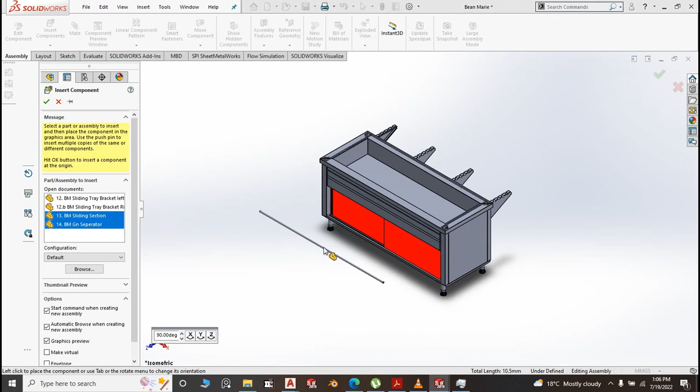It's just a matter of inserting those two components. Insert section and the GN separator, that and this.

Then we make concentric relationship. It is between this and this. Good. Then coincident, that is this and these flanges. That is good.

Then this part sits on top of the Bean Marie. That is good. We can go for distance. This should be 305. That is between this face and this face.

That is good. Then we can go to the right plane. I keep getting it wrong. Front plane of that and the front plane of the separator, the GN separator front plane. Yes, that is good.

Now let us make a linear pattern in that direction, and we need 4 of them, and the distance should be 305 plus 30, 335. Component is this. That is good.

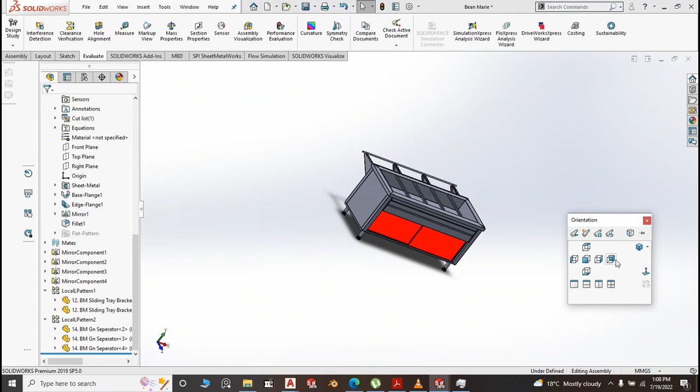Then we'll do again linear component. Linear component in which direction? This direction, the opposite direction actually. And we need how many? 5 of them at 60. 60, and we need 5. 5. And component, that's the component. The Bean Marie is done.

Yeah, so this, if I were to edit it and you want exact 3 or 5, we'll edit this sketch and make this 28. Something like that. And I'm sure, I don't know, it might be a bit big. Let's see.

I know why there is a difference. It is because of this bending, the bends in the separator. That should be what, 3 or 4. That is negligible. Even 3 or 2 was negligible. We still have some space.

Yeah, so the Bean Marie, it has taken us a lot of time, but it is done. I hope you learned something, and you can go to your workshop and fabricate a Bean Marie.

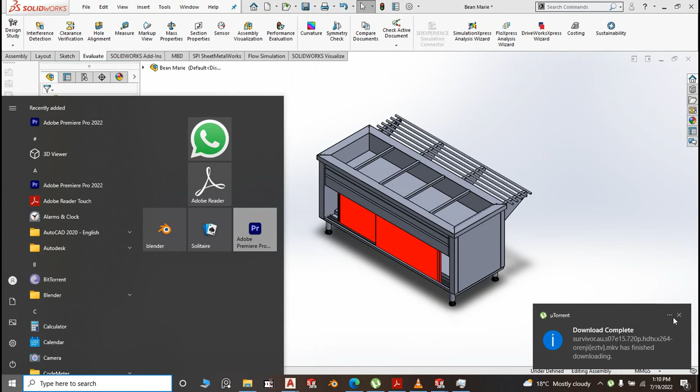And in our local market, a Bean Marie with a body like this goes for what? Goes for right around, let me see, I want to check. What is the dollar rate? 140 divided by, assuming that we are selling our dollar at 107, which I don't know, it's about $1,300 to $1,400 there in our local market. This whole Bean Marie as it is, without the GN containers, goes for that much.